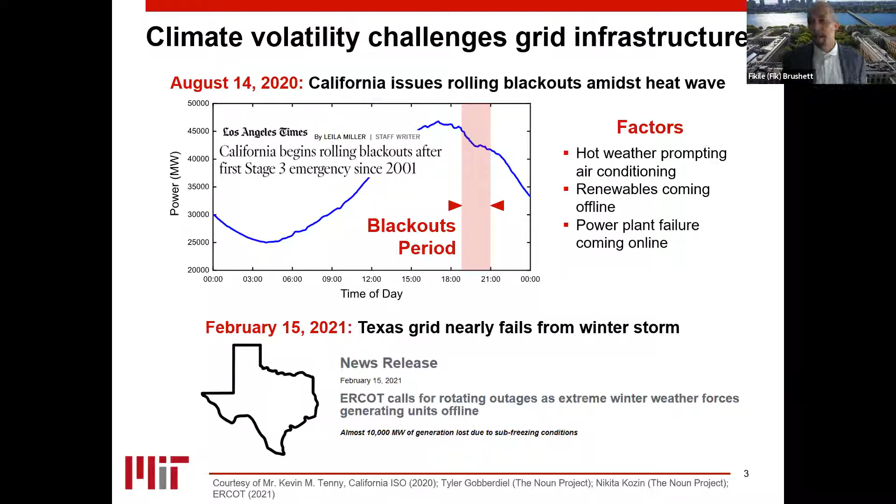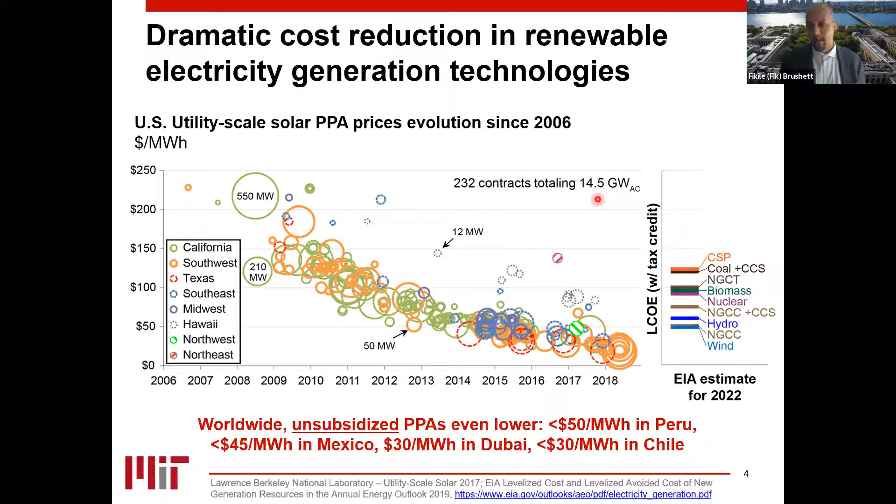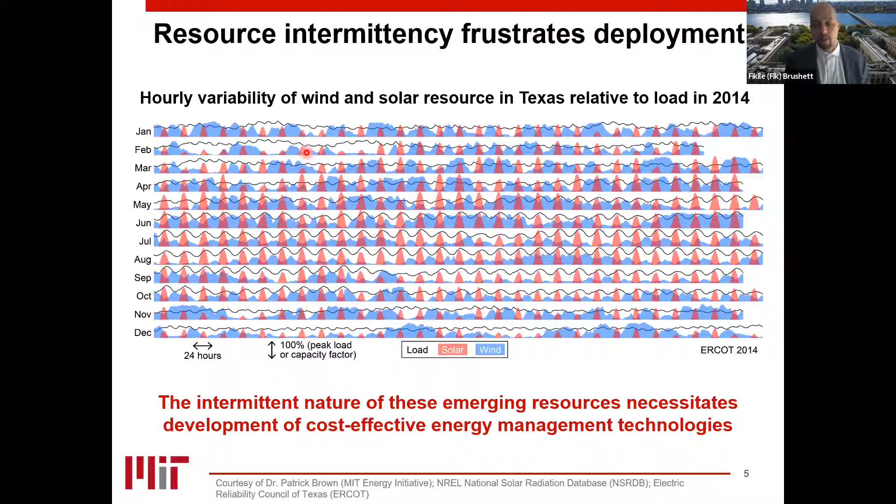And so understanding and controlling for these intermittencies are going to be very important the more and more reliant our electricity generation becomes on these intermittent resources. And this is going to necessitate the development of cost-effective energy management strategies. I'm going to talk about energy storage today, but there are other ways that this can be managed in tandem. For example, demand-side management, as well as buffering or growing transmission and distribution networks. And so that's something that I won't talk about today, but that is also another piece of this puzzle.

So the question my group tries to ask ourselves is, can renewables be the basis of a sustainable energy economy? So how do we take wind and solar electricity and convert it into stable baseload generation that allows us to advance our electric grid structure to give us more resilience, and potentially to build microgrids or off-grid type structures that can allow us not to have centralized distribution, but rather local distribution that might be more resilient, or maybe cheaper, depending upon the part of the world that you're in.

I think if you're able to decarbonize, deeply decarbonize electricity, that will then enable us to really address transportation. There are personal electric vehicles, there are public transportation resources that rely on electricity, but all of that electricity is usually generated from fossil resources. So in many cases, you're shifting emissions from one part of the economy to another part of the economy, but it all still goes up into the atmosphere.

And as a result, I think that if we're able to decarbonize electricity generation, then truly personal transportation that's electric will be effective. And then finally, maybe there's an opportunity to begin to decarbonize industry. If electrical energy generated from renewable resources can be cheap enough and reliable and available enough, maybe we can use it to enable transformations for fuels and chemicals productions. Maybe it would enable process intensification or environmental remediation, for example, like carbon dioxide capture from the atmosphere.

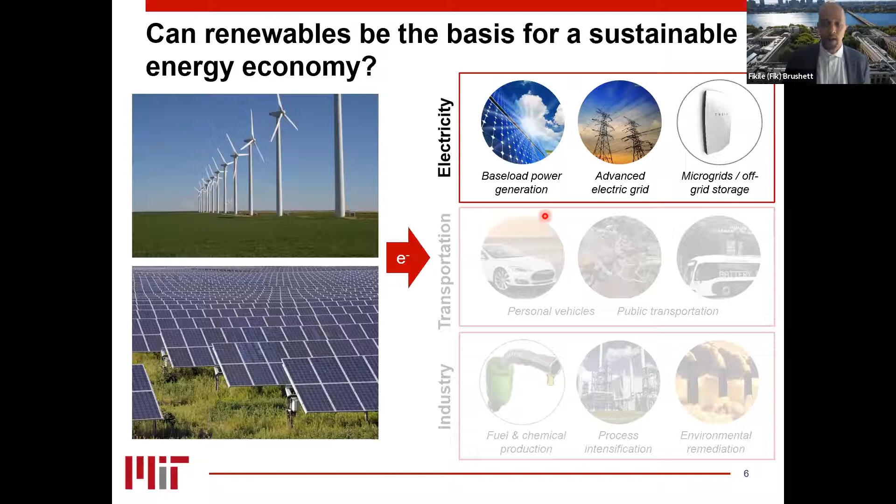I think all of these are possible, but the first step is going to be electricity and thinking about how do we decarbonize and provide reliable electricity from renewables at a low cost, that can then enable all of these other applications. And so maybe we'll start off with what are we doing right now?

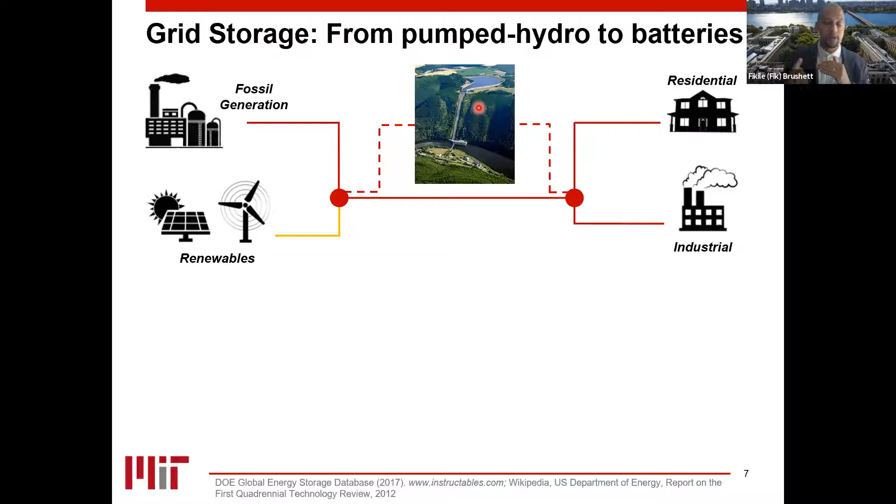This is essentially relying on storing water at different elevations. So the image that I'm showing you right here is water off of a river, and there's a reservoir a little bit higher up at a higher elevation, and taking water and pumping it uphill actually stores that water's energy as potential energy. As it then rolls back downhill, it becomes kinetic energy, and that kinetic energy can be used to power a turbine. You spin up that turbine and that generates electricity. So to store energy, you pump water uphill. To get that energy back, you let it flow back downhill and through some sort of a turbine.

These sort of resources can take advantage of a natural availability. So this is an example of Lake Michigan here, and this is Ludington, Michigan, where my energy is determined by the size of this reservoir right here, and the power is determined by the size of this pumping station right here. As you can imagine, these are very large installations, and they take advantage of natural infrastructure. Say the fact that we have large bodies of water that's available, and we can just dig out a reservoir that's a little bit at a higher elevation.

The challenge with these types of resources are the fact that there are environmental concerns with siting. Where can you actually put these kind of things? And there's actually also geographical concerns in the sense that you need a lot of space to store this amount of energy. And because of that, you need to find large open areas where you can actually site these types of energy storage devices. It doesn't really work close to load centers such as, say, downtown Boston or maybe downtown Shanghai or downtown Hong Kong. And so because of that, there's really a limit to how far you can install them and where they could possibly go.

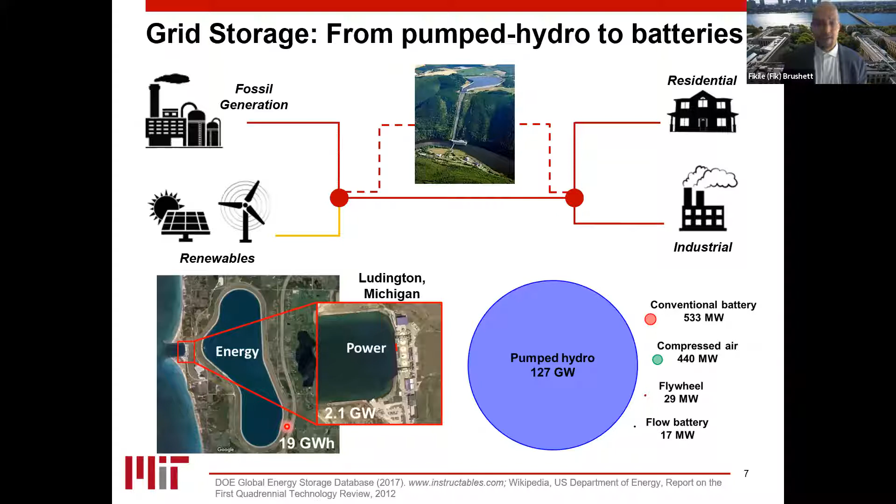And the final thing I'll mention here is that because these are very large projects, even though the storage of energy might be very cheap on a unit of energy storage basis, the fact that you need to build them so large means that it's actually a very large capital project, right? And as a result, getting the bankability for something like this might be a little bit challenging, especially if it's going to take you a long time to get a return on investment.

So the opportunity might be then to switch to something like electrochemical energy storage. I think all of you who are watching me right now probably have 2 or 3 batteries on you in your cell phones or in your laptop computers, right? These batteries are what I would call enclosed batteries, things like lithium ion. We may also be familiar with enclosed batteries as lead acid batteries in our cars for starter lighter ignition applications. For grid energy storage, we're willing to give up the energy density that's required for portable applications, because we'd like to basically site something that's large and doesn't necessarily need to move so much.

As a result, that opens up our design space so we can move from enclosed batteries to batteries that look a little bit more like, say, an electrochemical plant with a reactor and two tanks, this is a flow battery, or something in between that maybe tries to marry enclosed batteries and flow batteries as well.

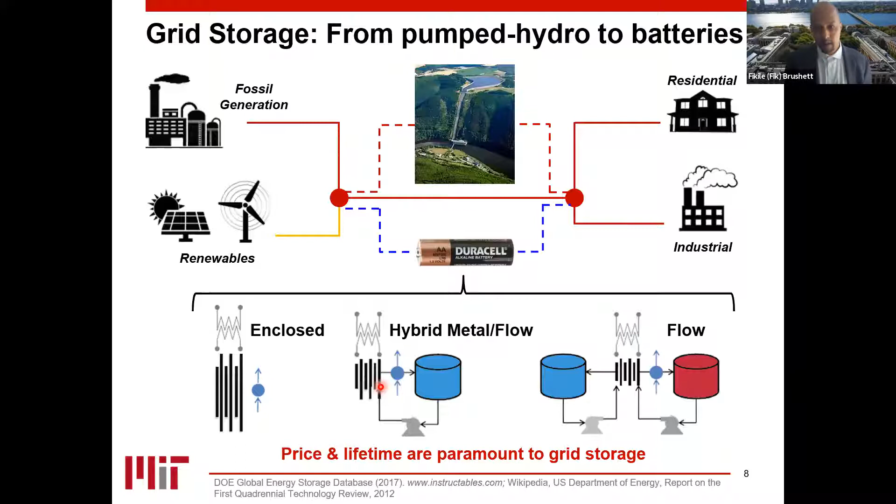The key here is that the price of the system and the lifetime of the system is paramount to grid energy storage, right? We're willing to give up energy density if it gives us benefits in price and benefits in lifetime. So the areas that we like to work in are redox flow batteries, which are very well suited for grid energy applications.

And I think you'll see, the folks who are chemical engineers on the phone, that there's a lot of chemical engineering in here. The way a redox flow battery works is that you have two tanks. In these tanks, you have electrolytes that contain electroactive species. In this case, I'm showing you a vanadium sulfate. This electroactive species is dissolved in an electrolyte, which is a supporting salt and a solvent. So it could be something like sulfuric acid and water.

In each of these tanks, you have a different redox couple, one that is more positive and one that is more negative. And the difference between these two redox couples in terms of their voltage is what defines the energy density of that battery. Essentially, one way to think about it is that that voltage difference is directly proportional to the Gibbs free energy of reaction. So that's how much energy is stored in the reactions when you charge it, and then when you discharge, that's how much energy you could possibly release.

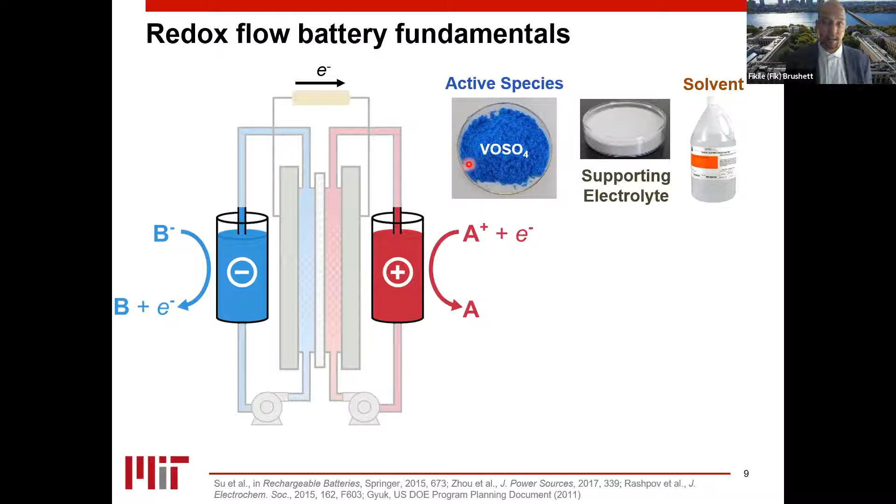And so what we try to do is to oxidize and reduce these active species within these tanks to store energy and release energy, or to basically store renewable power and then release it to the grid as we need it. To do that, these materials will flow through an electrochemical reactor. For those of you who are familiar, this looks a lot like a fuel cell. For those of you who are not familiar, I'll walk you through this multi-layer structure over the next minute or so. At the center of this electrochemical device is an ion exchange membrane.

It's usually a polymeric material that has fixed charge within it, something perhaps like Nafion. What you want for this polymeric material, as this ion exchange membrane, is to exchange ions back and forth between the electrolytes to balance the charge that is moving through the external load to maintain electroneutrality in your system. But you also want it to block the crossover of the active species that's storing energy.

If the active species move through this membrane, they're going to basically mix with one another. It'll be harder to separate them. And as a result, the energy capacity of your battery is going to drop. And you don't want that, because then you won't be able to meet your criterion for operation, right? So you'd like to prevent crossover.

Abutted to this membrane are porous electrodes with flow fields. The flow fields are designed to bring the electrolyte to this porous electrode where electrochemical reactions occur. There's lots of different ways to design these types of flow fields, but essentially what you want to do is to introduce flow into these porous electrodes where the electrochemical reactions occur. So this is an example of one of these porous electrodes.

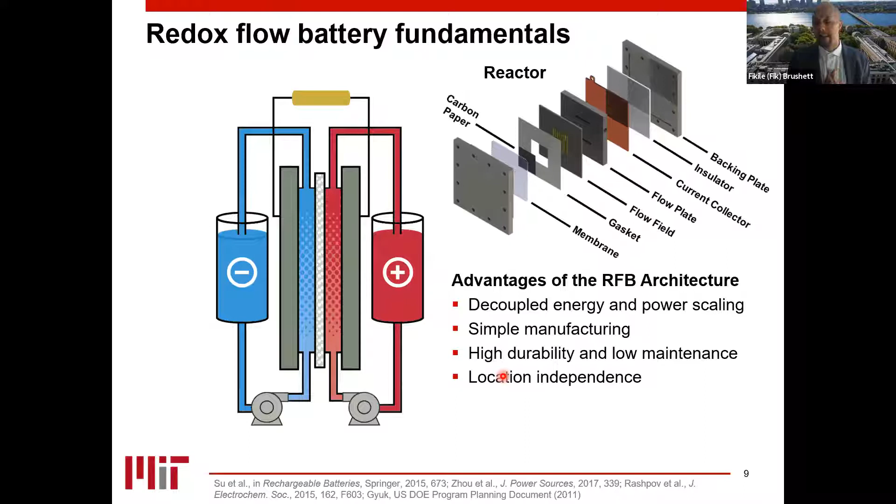And these components can be replaced without having to tear down the entire plant, right? I can sort of swap things during operation. And finally, location independence as compared to, say, something like pumped hydro. I can site these in a range of different locations as well because they're a little bit more energy dense and they don't require natural infrastructure in order to enable the energy storage.

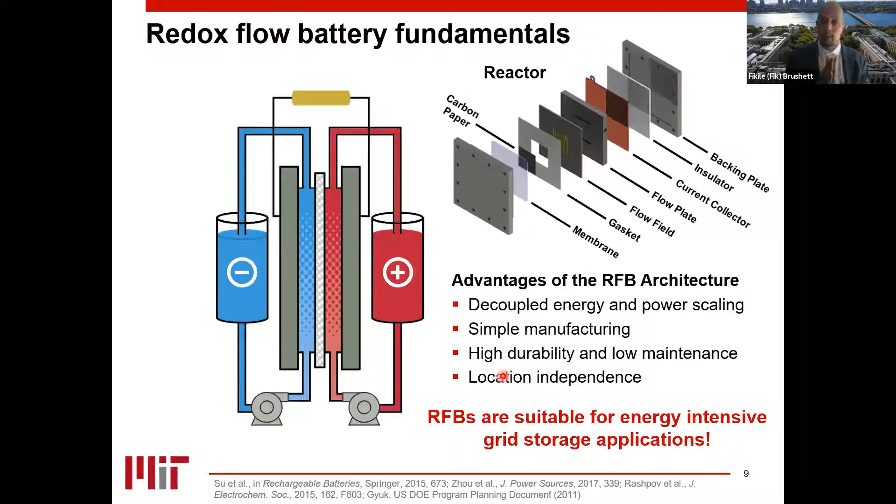This is because anytime you have a lithium ion battery, essentially what you have is a single unit. And to get to longer discharge durations, you're simply multiplying that unit. As you multiply that unit, though, you're not actually getting any sort of favorable scaling necessarily. It's the same unit over and over again, so you pay the same cost over and over again. For something like flow batteries, however, at relatively low storage durations, the cost is dominated by the cost of the reactor because your tanks aren't really big. But as your tanks get larger and larger, as you go to longer and longer durations, I need more energy, I start to asymptotically approach the cost of the materials that are in the tank. And so if you have very cheap materials in the tanks for long durations, you can get to very low capital costs. Because again, this is this separation of scaling between my power components and my energy components.

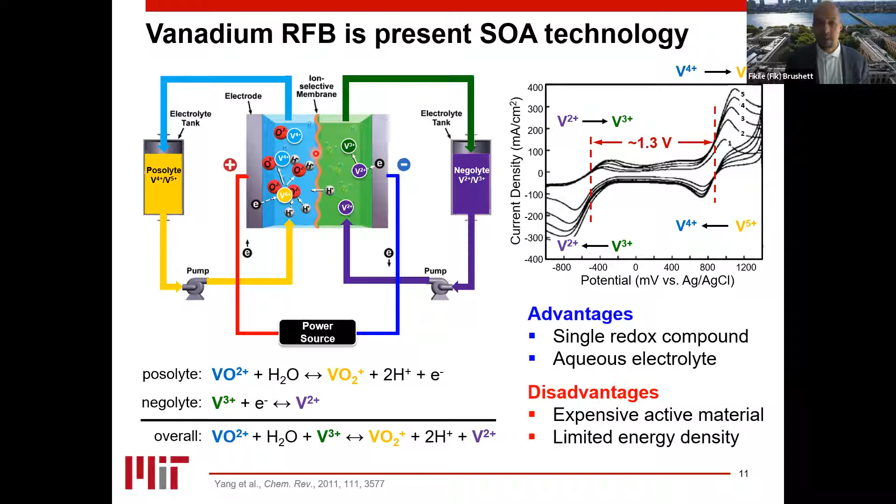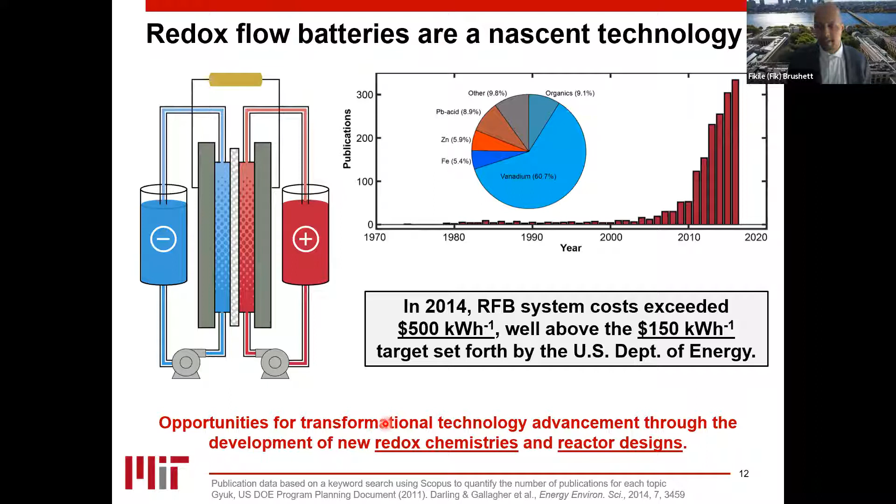Going away from expensive perfluorinated ion exchange membranes to materials that rely on size selectivity, things that may look a little bit like a coffee filter, right? And going to more advanced cell designs that are particularly designed for flow batteries rather than borrowed from other technologies. And so some of the questions we ask ourselves here is, what does success look like, right? So what we'd like to know is, what would our flow battery need to look like for us to be successful? Being great in one of these areas is good, but we need the entire system to work well in order for us to get to lower costs, right?

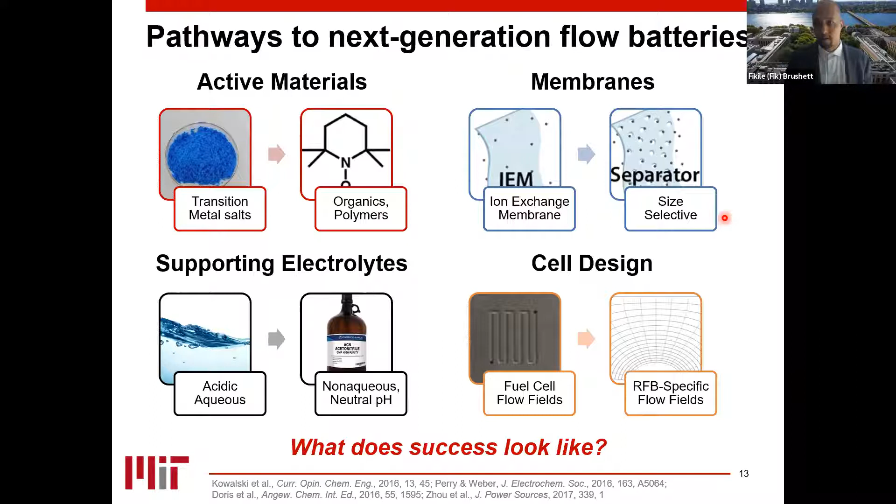And so the approach that we've tried to take from that is to think about techno-economic modeling. The way we think about techno-economic modeling here is actually to back translate from desired system cost and performance to ranges of materials properties, cost parameters, and component performances that we might be able to use in a battery that would hit some sort of set design target. So it could be $150 per kilowatt hour, and we might want it to last for, let's say, about 20 years or so.

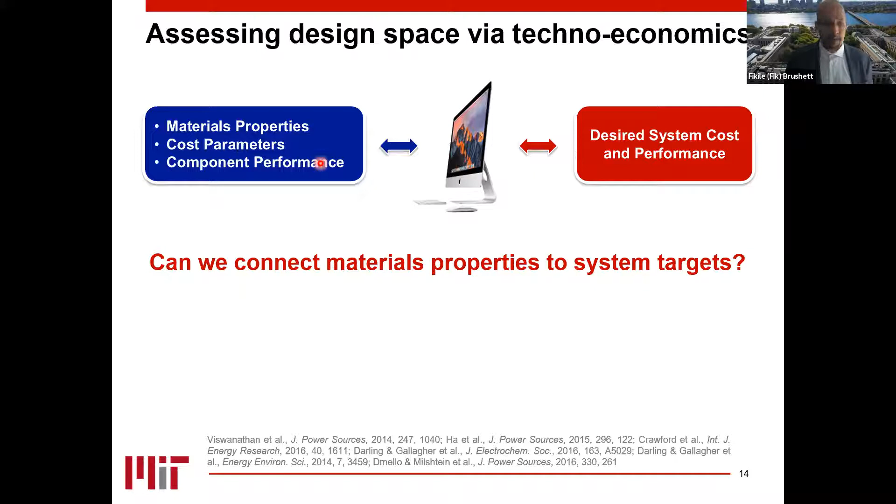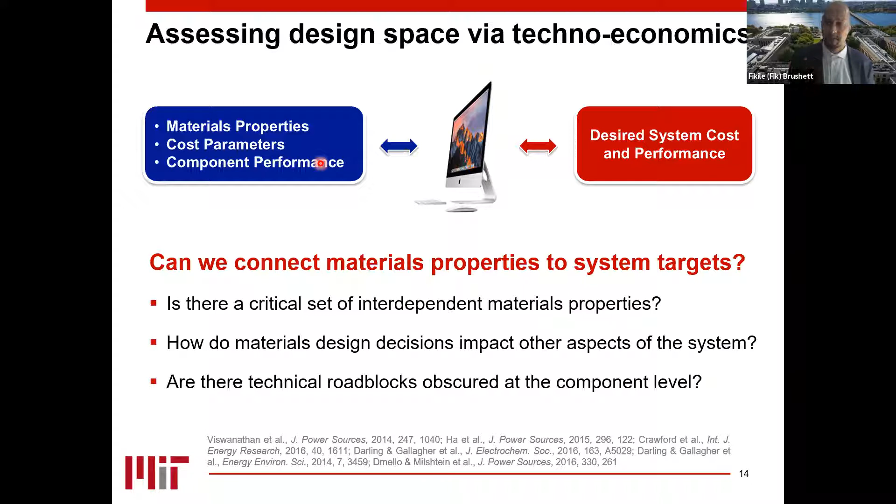So we're asking ourselves, can we connect materials properties to system targets? And the way we try to think about that is, are there critical sets of interdependent materials properties that we need to know about? What are materials design decisions? How do those impact other aspects of the system? And what are technical roadblocks that might be obscured at the component level? And if we ask ourselves these questions up front, we think we can make better decisions to help to accelerate the development of these technologies.

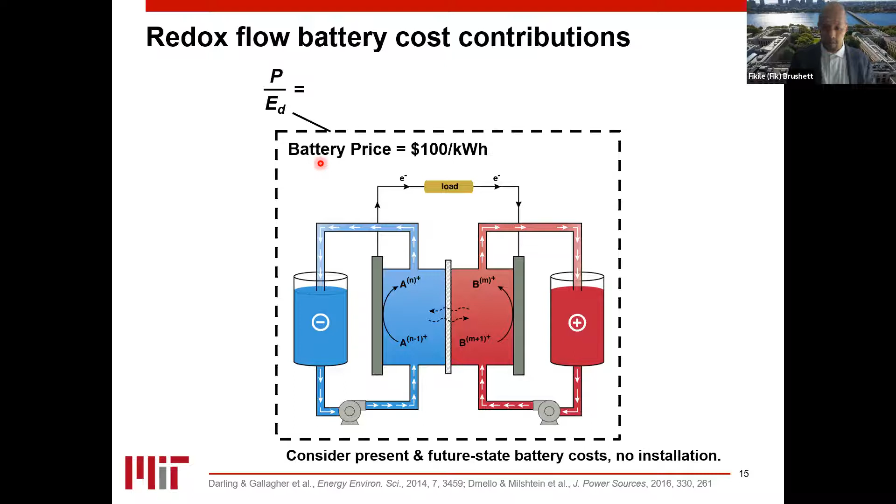Just to give you a little sense of how we go about this, when we think about cost contributions for the redox flow battery, if we want to draw a control volume around our battery and say we'd like the battery price within here to be $100 per kilowatt hour, we need to pay for our reactor, we need to pay for an electrolyte, we need to pay for balance of plant, the pumps, tanks, heat exchangers, all the other things that you need the battery to work but don't actually store energy. And we need to think about additional costs, like depreciation, labor, overhead, and a profit margin. If you want it to be a price, someone has to make money.

In this case here, we usually consider present day and future state battery costs. We think about present day to benchmark our costs to make sure that we're capturing all of the right components, to figure out, do our models match up with what's available in literature and what companies are telling us? And then future state basically says, let's suppose that we have high volume production in a competitive marketplace. Think about a world with multiple competing gigafactories of flow batteries.

And then you could say, how cheap would that battery be able to get? If my battery can hit my cost targets in that scenario, it might be worth pursuing. If everything breaks in your favor in that scenario, though, and your battery still can't hit that cost target, you might not be able to make that cost target.

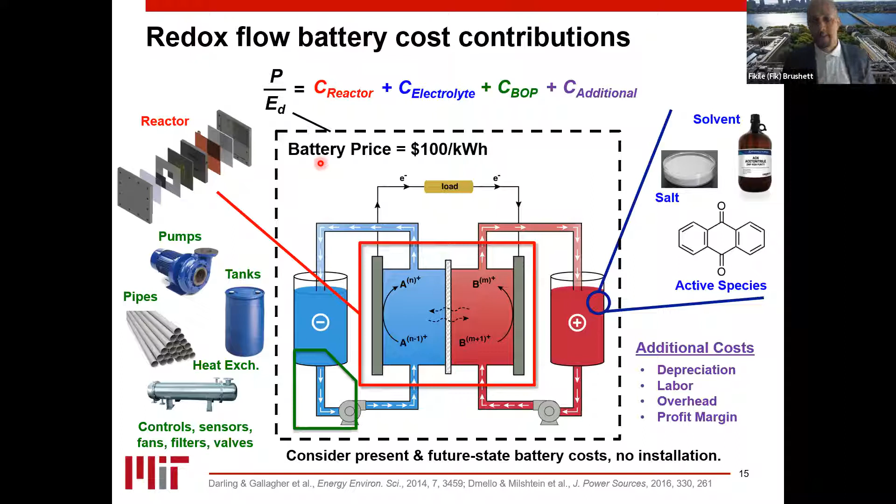And so it might give us some sense as to what are more favorable pathways moving forward and what are pathways that maybe aren't quite going to get us there. An output of these techno-economic modeling, and this is a busy slide, don't worry too much about it. I want to talk you through the high level.

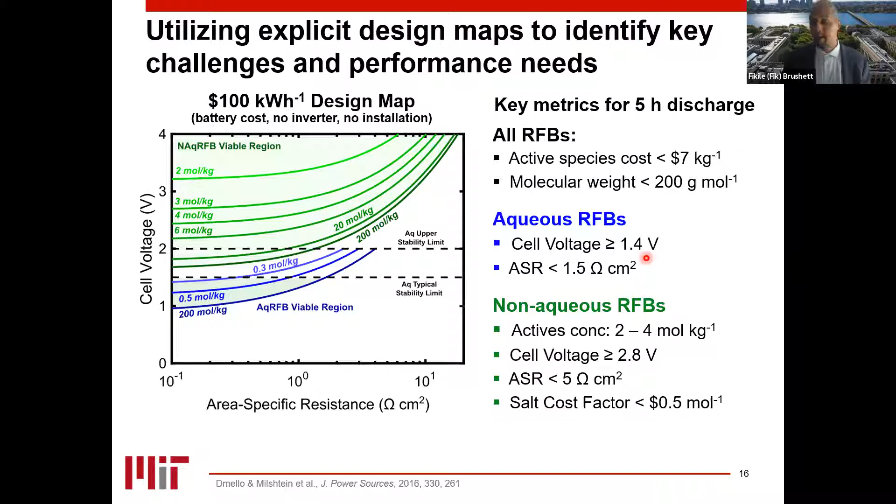So we can sort of figure out where we are in this design space and how we might want to move to get to low-cost batteries. From there, we can extract key metrics that give us some guidance as to what our active materials might need to cost, what we think our molecular weights of our active species might be, and then specifically for aqueous and non-aqueous batteries, what are a list of key criteria that would need to be met in order to get batteries that would hit this $100 per kilowatt hour design mark.

What this tells you also is it gives you some sense as to the risks of different technology pathways. So for example, non-aqueous redox flow batteries may have a broader range of potentially viable options. Look at this big design space right here, but there's much more technological risk than say aqueous flow batteries.

In the remaining time that I have, just a few minutes, what I want to do is talk then about where are we going? So you have these design maps, you have this approach. So what are pathways to lower cost energy storage? How are we potentially going beyond vanadium, or how are we going to make vanadium better? So there's one way to think about this, and this is taking a quote from a colleague, Don Sadoway, in the material science department here at MIT.

If you want to make a dirt cheap technology, make it out of dirt, and preferably make it out of local dirt. And so one example of local dirt could be something like sulfur. As long as we use oil and gas, we're going to get sulfur. It comes up with that oil and gas. And there's large amounts of sulfur that's available around the world. We've thought about the use of sulfur in flow batteries, both in the case of thinking about maybe sulfur and oxygen as a really cheap set of redox chemistries.

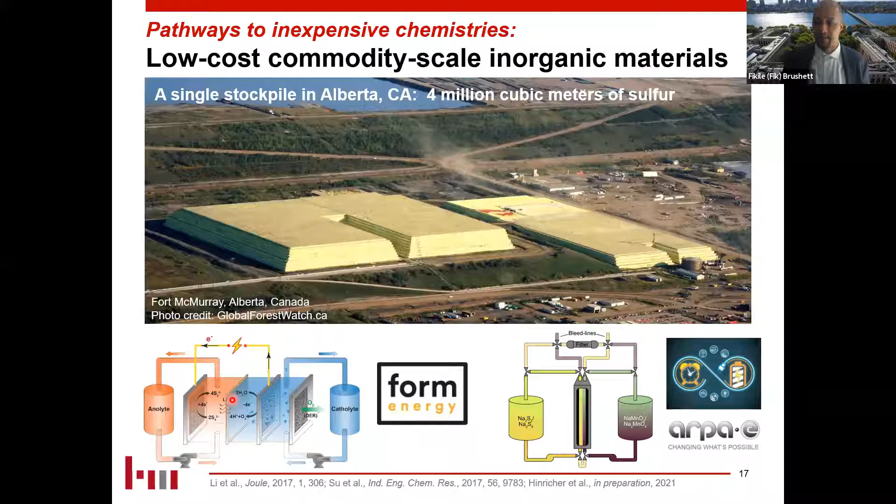And this is something that ultimately led to the founding of Form Energy by Yet-Ming Chiang and others in the material science department. We can also think about pairing sulfur with other really cheap inorganic materials, such as something like a permanganate type solution, which is another thing we're pursuing.

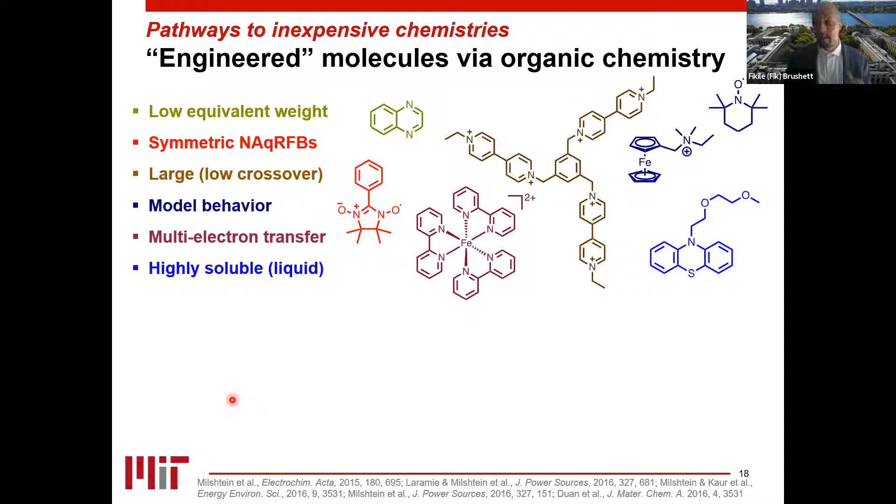Another way to get to low cost is engineered molecules. These are things like organic molecules or organometallic molecules, which can be functionalized via organic chemistry to give us a range of desirable properties at potentially low cost. And so you can imagine we can tune these molecules in order for us to be able to get to the targeted property sets that we want, right?

As a chemical engineer, I'm an okay chemist, and so our pursuit of these molecules is often done in collaboration with other folks within the chemical sciences. So people who have a lot of subdomain expertise, what I mentioned earlier within this presentation, but these folks also do not necessarily have much of a background in the design of redox flow batteries, but they provide us with a lot of expertise. And if we can give them some sense of the properties that we want, they can really help us advance the technology.

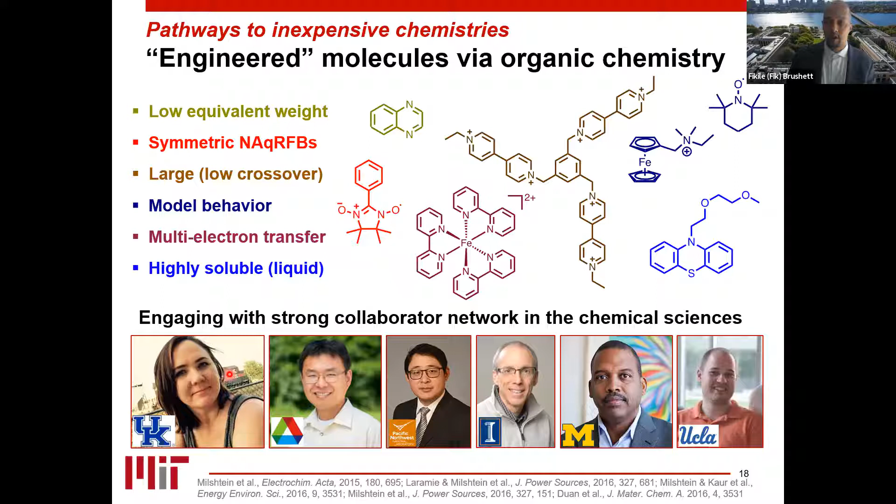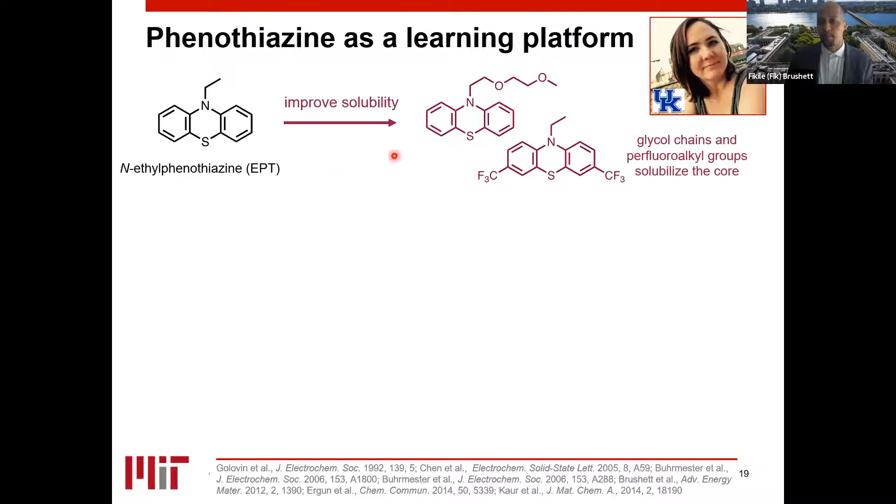And just to give you an example of some work we've done with Susan Odom's group at the University of Kentucky in collaboration, we can take a molecule like N-ethylphenothiazine, which is an interesting redox molecule for energy storage. And we can do things like improve the solubility through the addition of, say, glycol or perfluoroalkyl groups that will solubilize it in different electrolyte compositions.

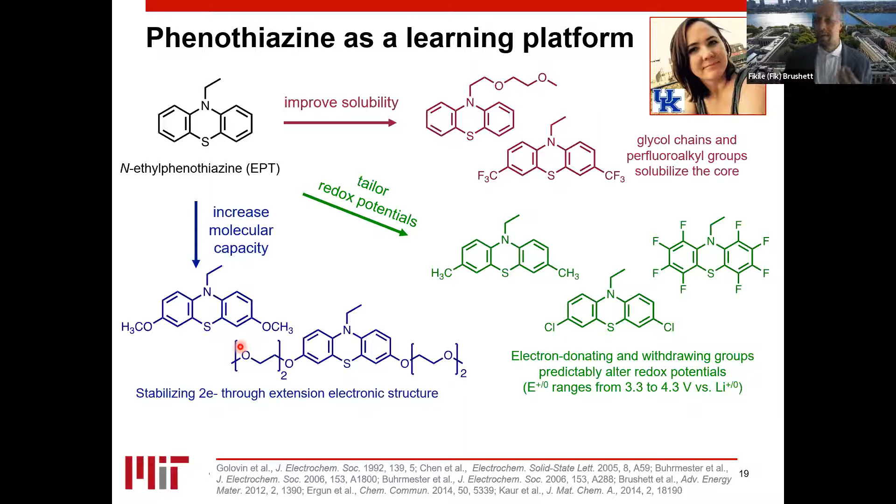We can tailor the redox potential, so moving the cell voltage around by appending electron donating or electron withdrawing groups. And we can stabilize multi-electron transfer, so doubling the energy storage capacity of these molecules per unit molecule by changing some of the molecular structure to support 2-electron transfer. And all of these efforts are done with a design ethos focused on 2 to 3 step syntheses and scalable routes.

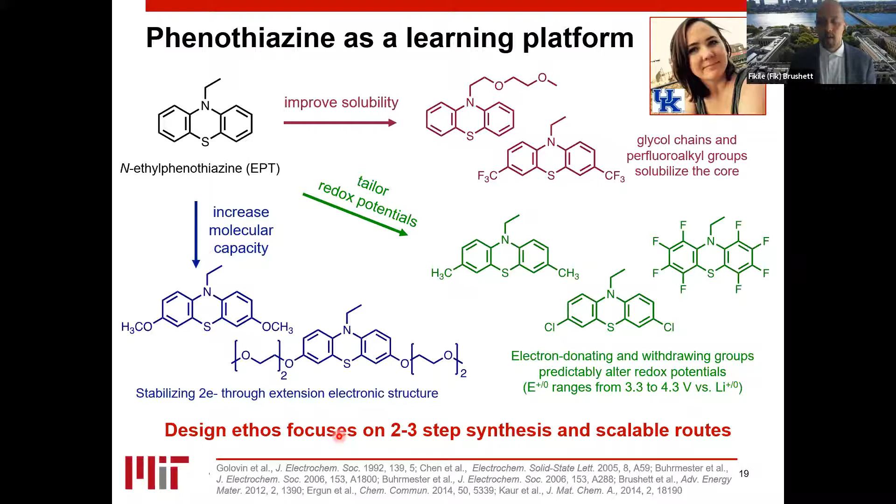So once we identify interesting compounds, there seems like a pathway to scale up and for manufacturing of these newer type materials for replacement or addition to redox flow batteries at scale.

A lot of the way we think about flow batteries as well is developed by thinking a lot about how do we think about cell design and manufacturing, especially when we're working with newer materials. Working with larger subscale designs and full stack designs is not necessarily desirable. It requires a lot of material in order to run these types of cells. And in order to run those cells with a lot of material, it's going to take a lot of time, it's going to take some effort, and there may be safety considerations if you don't fully understand your material.

So a lot of the work we've also focused on is developing small scale research cells as platforms with which we can study some of these newer redox compounds and also provide these platforms to other members of the community so that they may study some of their own materials in their own laboratories or in their own workspaces to get some sense as to how well their materials work and whether they're beginning to approach some of the design targets that we've set out beforehand. And I'm happy to talk about some of these research cells to anybody who's interested, because we try to get them out to the community as best we can.

So I'm at the top of my time, and I just wanted to leave us with 3 grand challenges before I wrap up here and hopefully get some Q&A. So the first is that I mentioned that we need to move quickly. I said that the scale of the problems that we're trying to address is far greater than almost anything that we've seen in terms of human development and society in terms of decarbonization. So what we want to ask ourselves is, how do we get there faster?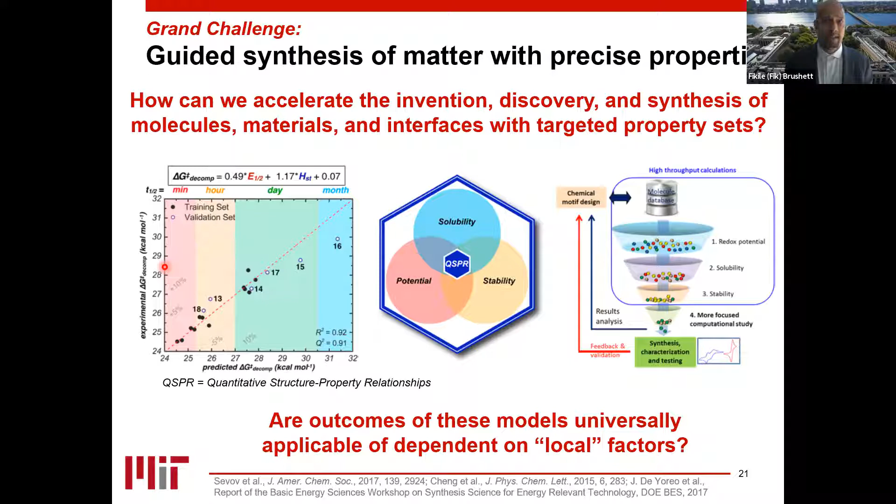Some of the challenges with these approaches right now are the outcomes may not be universally applicable. They may be dependent upon local factors like the type of electrolyte you're using, or say the way you want to operate your battery. And so getting these models more tightly calibrated with experiments and operations is a big step forward. And if we can do that, I think we can really unlock and accelerate materials discovery.

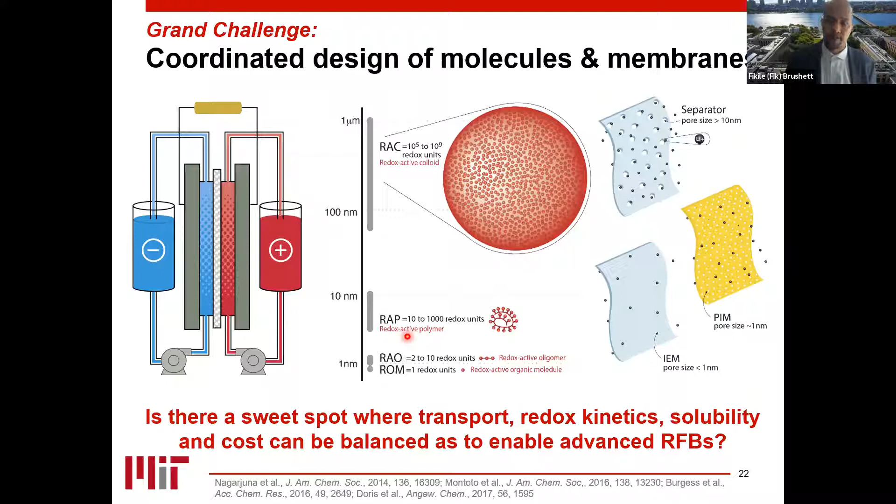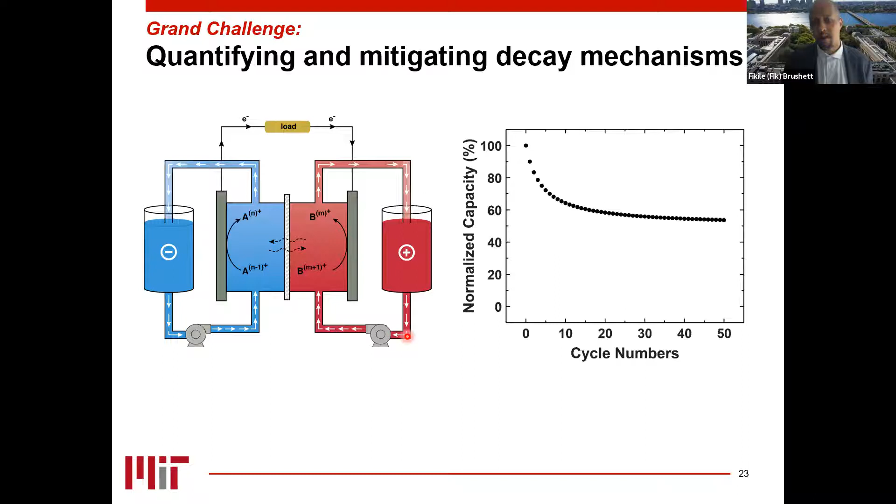And then the last grand challenge is going to be quantifying and mitigating decay mechanisms. If we want these batteries to last for a very long time on the grid, we need to make sure we understand how they might decay and how that decay might be mitigated. And this could involve, again, computational analysis. It could involve a deep understanding of the decay mechanisms within these molecules and steps that could be taken to prevent these decay mechanisms. Or this could be done through clever engineering, where I can control my operating envelope to make sure that the battery doesn't begin to decay over operation. So there are many different ways to think about this, but the idea is that we'd like to get there faster.

We don't want to wait 20 years to figure out how a battery is going to decay. We'd like to know how the battery is going to decay quite quickly, so we can figure out ways to make it more profitable and to advance ourselves a little bit more quickly.

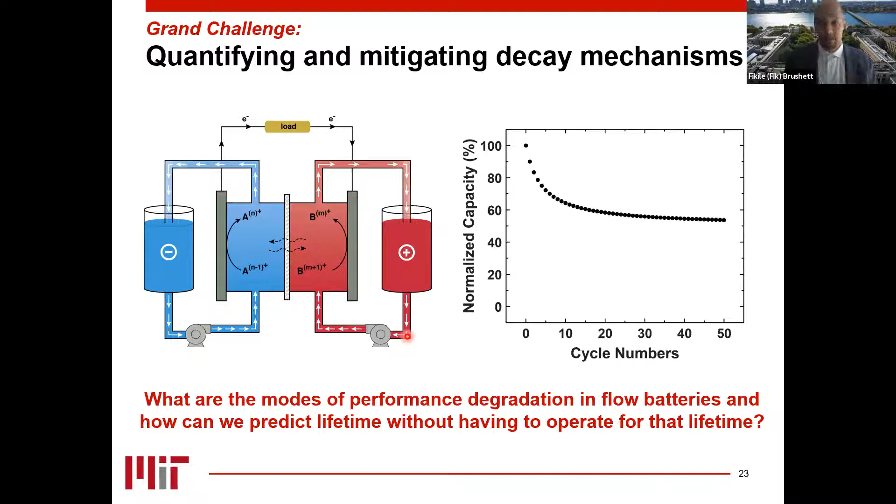And so with that, I'd like to thank you for your attention. And in conclusion, early stage techno-economic modeling can really help to inform research directions and highlight technical bottlenecks. We think it's very interesting to apply those problems to redox flow batteries, which I think are very promising for long duration energy storage, provided we can identify inexpensive electrolyte chemicals and reactor designs.

I think it's important to think about techno-economics at first, because it can really help us map this very large design space and identify where do we want to put our efforts and where would we get the most bang for our buck as we begin to move forward into this design space or into the future here.

And then finally, use of redox probes and diagnostic platforms, like I mentioned at the end, can really help to illuminate new pathways for cost-effective battery systems. And I think this is a really great opportunity to really get into this area and begin to make a difference through these new platforms.